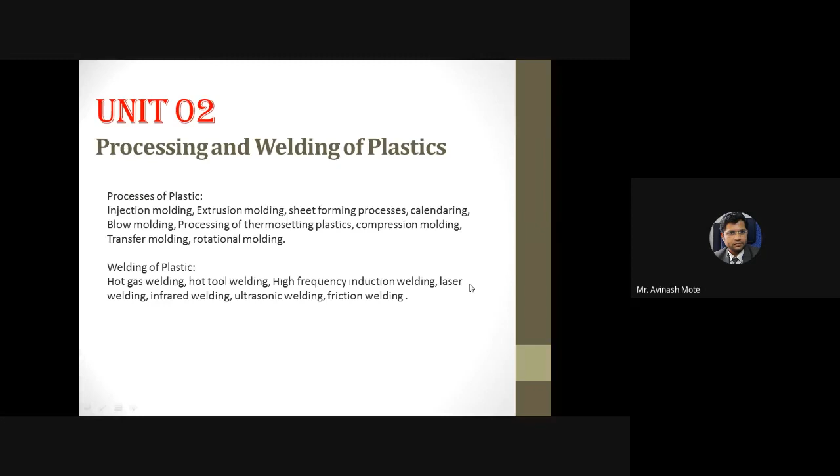So let's start with the first part of this unit, the processing of the plastic. There are so many methods for processing plastic. We are going to see the important methods widely used in industry nowadays. Processing of plastic simply means how any plastic product is manufactured. I need not explain much more about plastic products or applications, since we discussed so many applications in the last lecture.

The first... Okay, hold on, I think I lost my connectivity. Just 2 minutes, there is an issue with the connectivity. Just a minute, I'll come back once again.

So the processing of plastic is differentiated into two categories based on properties: the first is thermoplastic, and the second is thermoset. In the case of thermoplastic, as we discussed earlier, once you heat it, it will melt, and once you cool it, it will again solidify. It is totally reverse in the case of thermoset. So there are different methods for each.

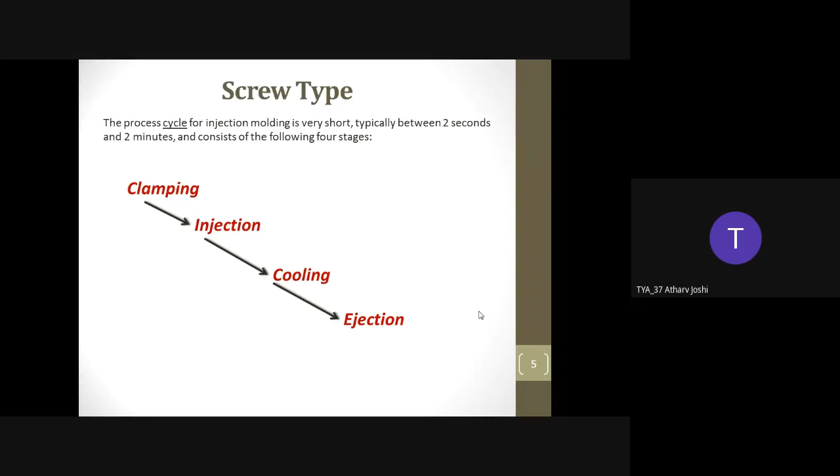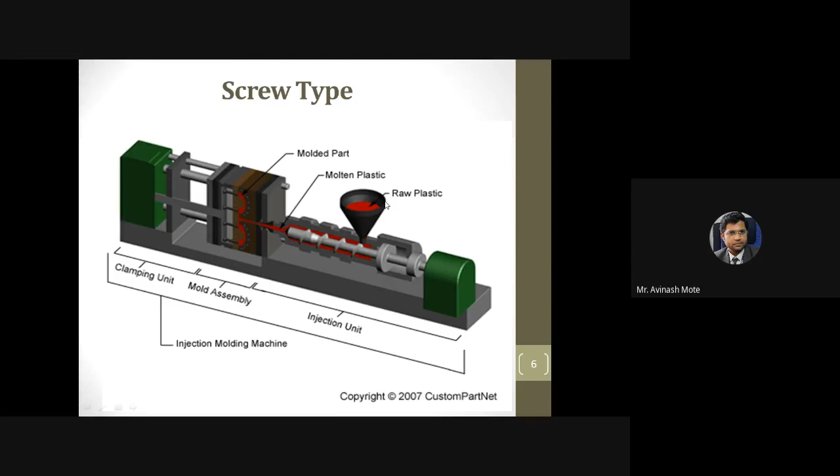The raw plastic may be in the form of powder, or in the form of pellets like tablets, or in the form of granules. This is given in the hopper, and there will be a heater around this screw which will melt down the raw plastic. Once this screw starts rotating, it will force this liquid inside the mold.

In casting, the mold has two or three plate molds, so it's not a single assembly, it can be separated. Clamping units and clamping bolts or simple clamps are used. One is a fixed part and another is a movable part, and in between there is a mold cavity. Once the liquid is forced inside this open chamber, the clamp is closed.

Outside this there will be a cooling unit, and that cooling unit will cool down that particular mold plastic which is in a molten condition.

So the first part is clamping. The mold will be placed inside this clamping unit, and the entire setup will be clamped. Then the second is injection. The screw will start rotating. There will be a hydraulic attachment, or a motor which will rotate the screw, and the rotation of the screw will cause the injection of the liquid plastic charge into this mold.

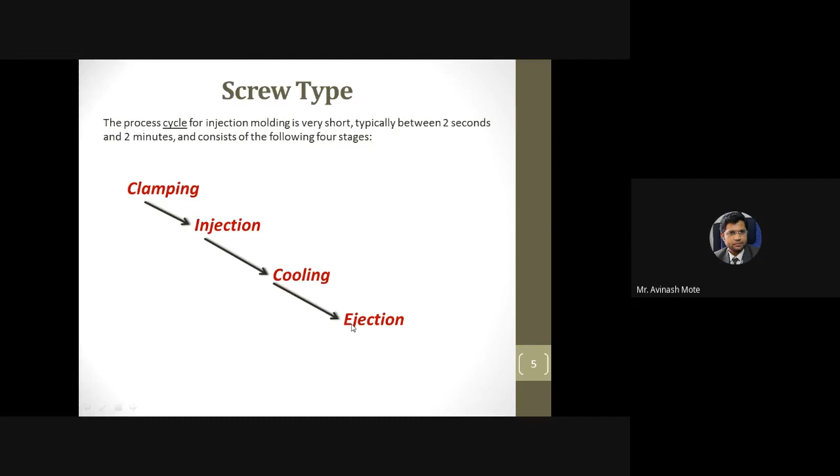This extra material you can trim down afterwards, and this final product you will get. Now, ram type - a simple structure. Here there was a screw for pushing the liquid plastic forward, and here it is only a ram, similar structure. Here is a hopper at the top, and the ram will push the liquid.

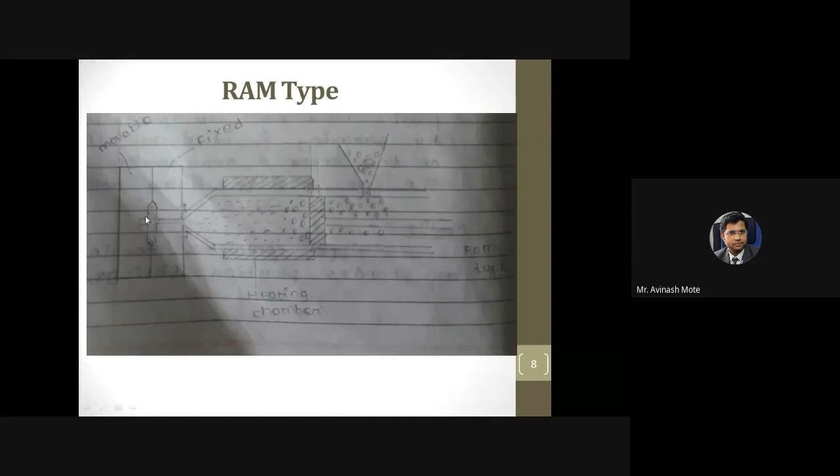It is simply like an injection. Mold will be as it is, heater will be as it is. Only in case of ram type, this ram will push the liquid. This ram will be attached to a hydraulic attachment, or sometimes pneumatic, or a motor - obviously reciprocating type - and this will push up the charge inside the mold, and it will take the shape as per the mold design.

So for better understanding, let's have some videos, you will understand it easily. Diagram will not explain everything. Let me show you.

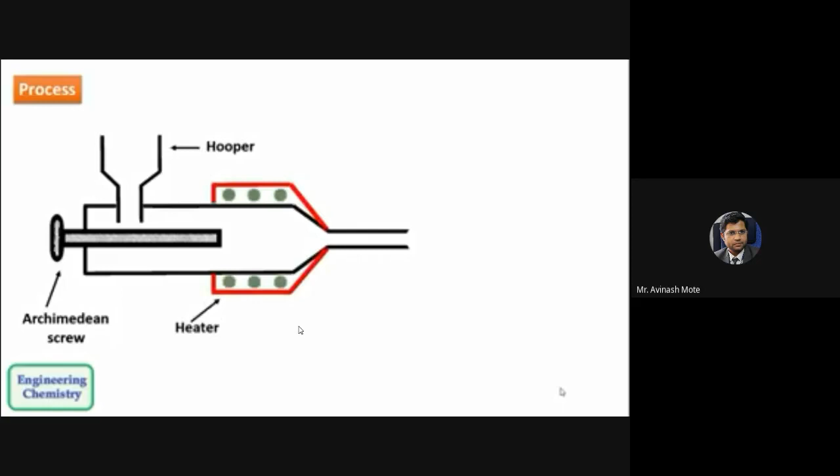So this is a hopper, this is a screw, or it can be a ram. Understand the setup, just a simple difference - either it may be a screw or it may be a ram. Obviously the pushing mechanism will be at the back side, and here will be a heater or heating coil, which will heat this particular liquid, and as per the shape, this will give the product.

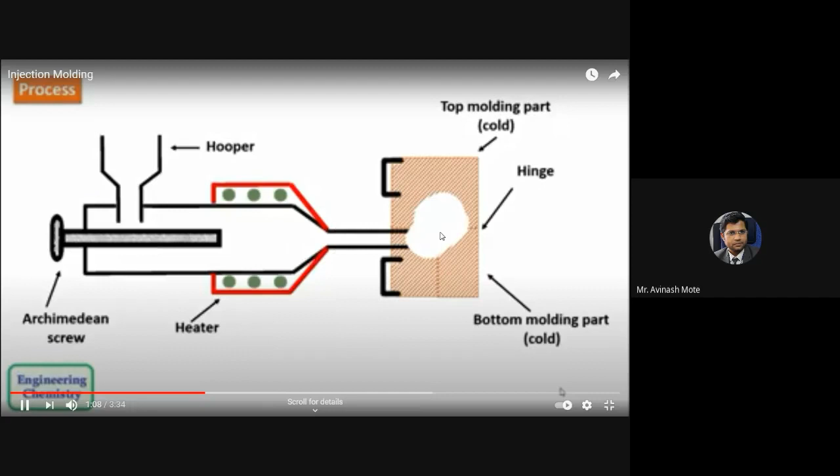Understand the meaning - here it was in a solid state, and here it is in a liquid state.

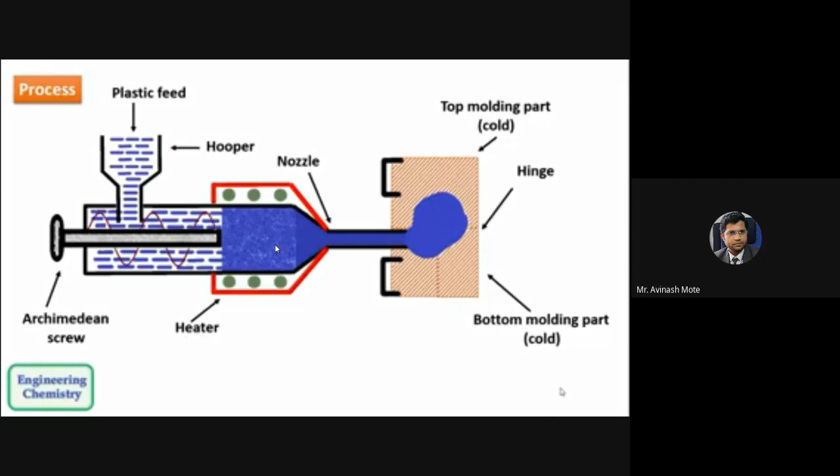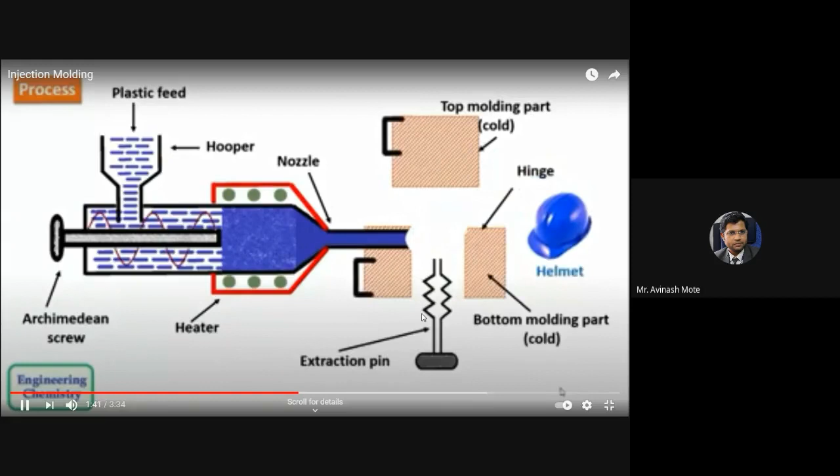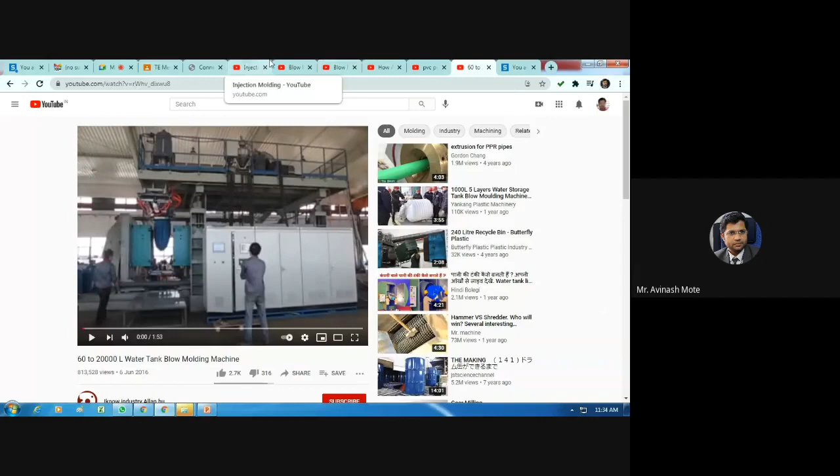Okay, so simple. I may have another one also. This is for blow, right?

A simple one. In case of ram type there will be a ram, and in case of screw type here will be a screw. Pushing the liquid inside this particular mold through this opening or orifice by using screw or ram. If it is a screw, it will be a screw type. If it is a ram, it will be a ram type.

Now you will understand the advantage and disadvantage also easily. There is no complication in this process. You change the mold design, you will get the part accordingly. But here, if you see this part, we cannot have a thick wall thickness. We cannot go for more wall thickness. There should be a thin part. Complexity we can manage, but it should be a thin part. If we go for a thicker part or large wall thickness part, this mold design will be quite large.

And again, what is the problem? See, if thickness will be more, when this liquid plastic enters the mold, till it fills the entire section, it will start cooling down and settle immediately. So that is the problem. So flowability should be good if your wall thickness is going to be more.

Simple parts with less wall thickness we can manufacture very easily. Now there are so many applications like cups, small thickness containers, housings. Mostly housings are made from this particular machine or process, because housing or casing doesn't require more wall thickness. If you see the mixer casing, or any type of casing required, that is made through this process, because housing doesn't require more wall thickness, simple and no complex features. Housings, handles, plumbings and fittings - these types of parts can be easily manufactured through this.

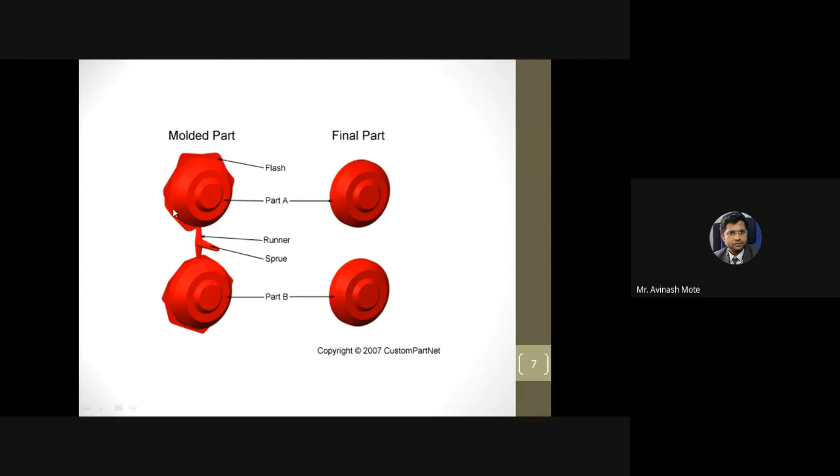Minimum wastage - you may have seen here, less wastage. If you see this extra material, it's just because of this mold design also. So if your mold design is proper, this also can be reduced. So wastage will be very less, and complex geometry can be produced, but there are some limitations.

Now, higher tooling cost and setup cost - major issue. Now see the structure, screw, mold design, and this entire setup. The machine will be required to push up the screw, machine will be required to push up the ram. This entire setup will have a huge tooling cost. But this is a one time setup, obviously, but the initial cost is very high. Obviously this heating element will also be there. So the major disadvantage is that the cost of the machine is going to be more. It may be a screw type or a ram type, but the cost will be more.

But whenever you are having bulk production, you can go for this, and less variation of the parts.

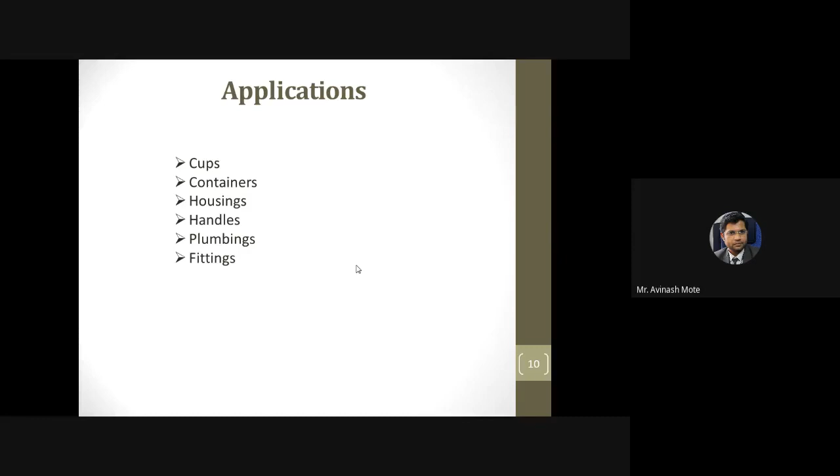Second one, again the most widely used, more than injection, this is called extrusion molding, the most widely used process. Similar to injection, only the pushing of the plastic will be different, in a different way.

Example I have given, simple to understand - squeezing of toothpaste from the tooth tube. You know how we are doing it, squeezing of toothpaste from the tube. It is as simple as that. That process is actually called a squeezing process or extrusion process. What is happening there? You are just pushing or pressing that toothpaste tube, and the toothpaste is coming out in the form of a barrel. Because it is in a semi-liquid or semi-solid state, the liquidification level is quite more, so it is not coming directly in the form of a barrel. But if you push it forcibly, it will come out in the form of a barrel. Why is it coming in the form of a barrel? Because whatever that orifice is there, the toothpaste opening is in the form of a simple circle-like opening, so it comes out in the form of a barrel.

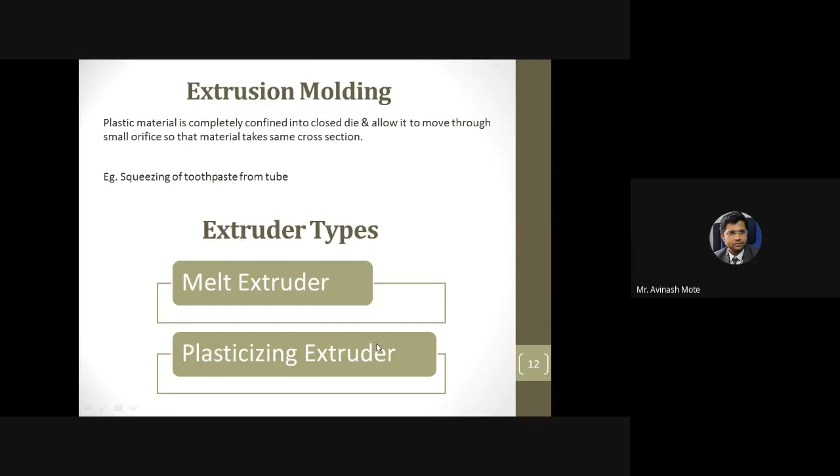So this is a simple example of extrusion molding. Now there are two different types depending on the extruder - the first one is a melt extruder and second is a plasticizing extruder. Melt, in the sense, only pushes the molten plastic, and in case of plasticizing it is pushing the solidified plastic also. Only basic difference - a molten plastic will be extruded here and solidified plastic will be extruded in case of plasticizing extruder. Only molten, and only plasticized or solid plastic particles.

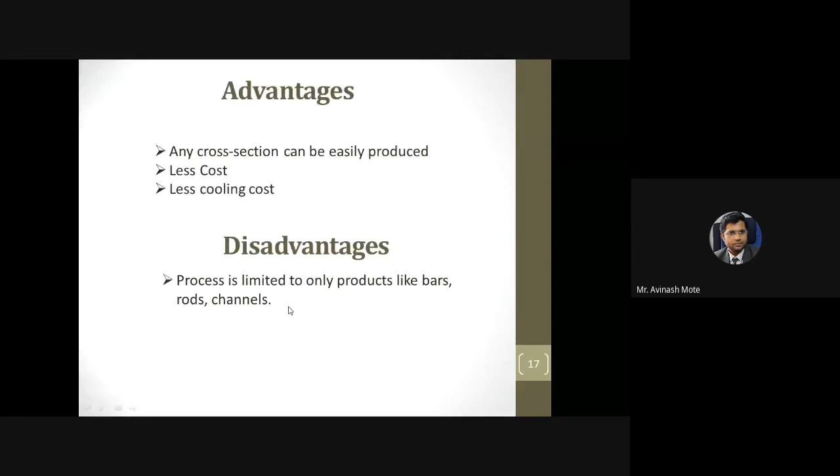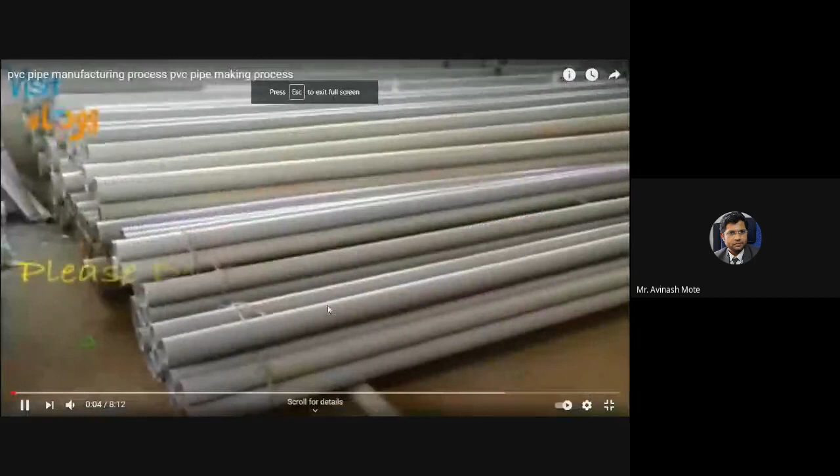Now see, we'll have a good... just see it now. Quite a local video, but an interesting one - it will explain everything.

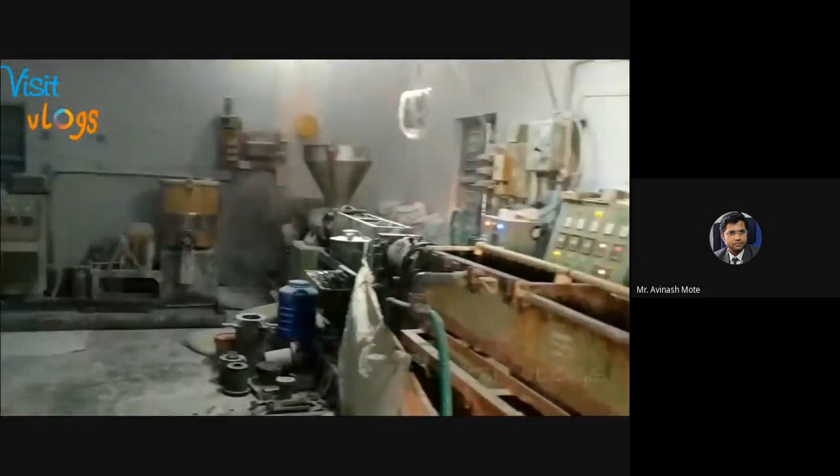This is a local setup, a local unit. But see, here is the extruder - sorry, hopper, and this is the extruder. And if you see, here is a cooling tank - are you observing this pipe which is dropping water continuously? Here is the setup, this screw type setup, the hopper. Now you will understand each and every process here properly. Check it out.

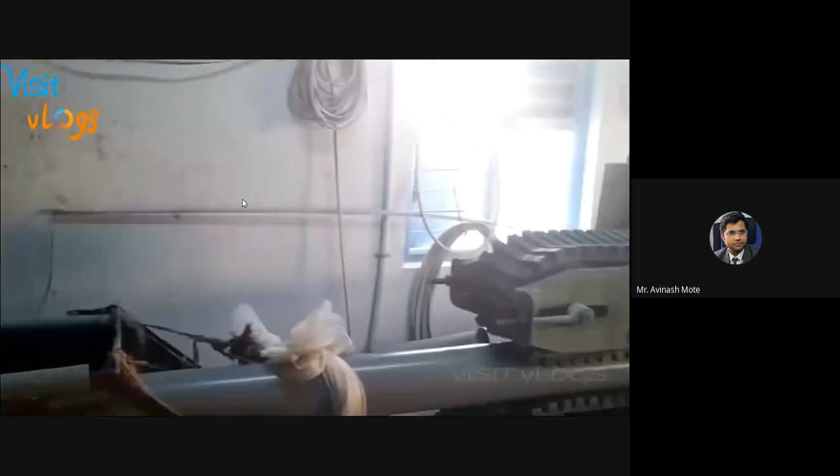This is like a roller which is giving the proper shape. See here, what is this - this is raw plastic. Now what is actually happening, if you observe at the back side, these are recyclable plastic pipes, and this is waste. This waste is first crushed in the machine, and small plastic particles are prepared. These plastic particles are again reused for the manufacturing of plastic, so it is a reusable type.

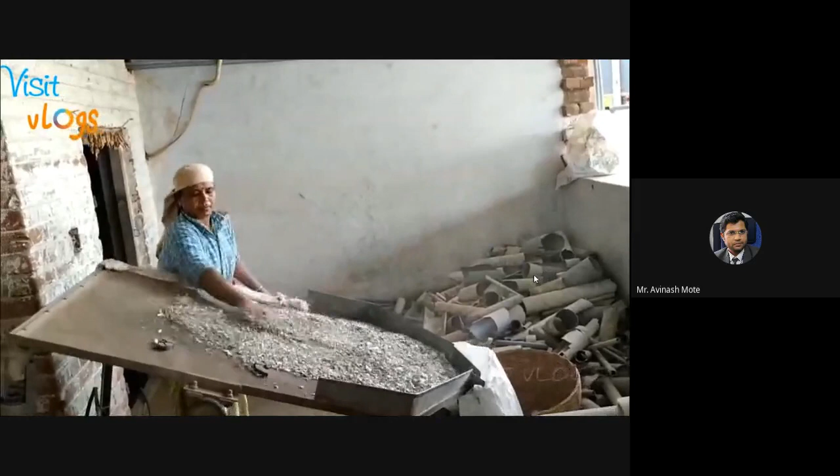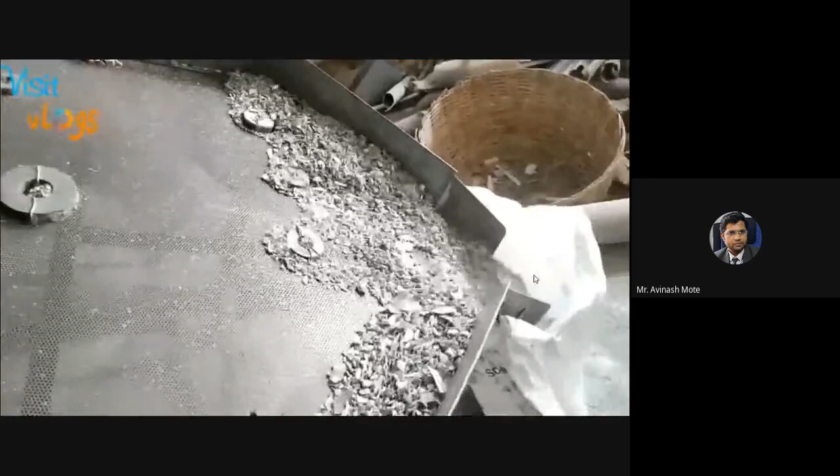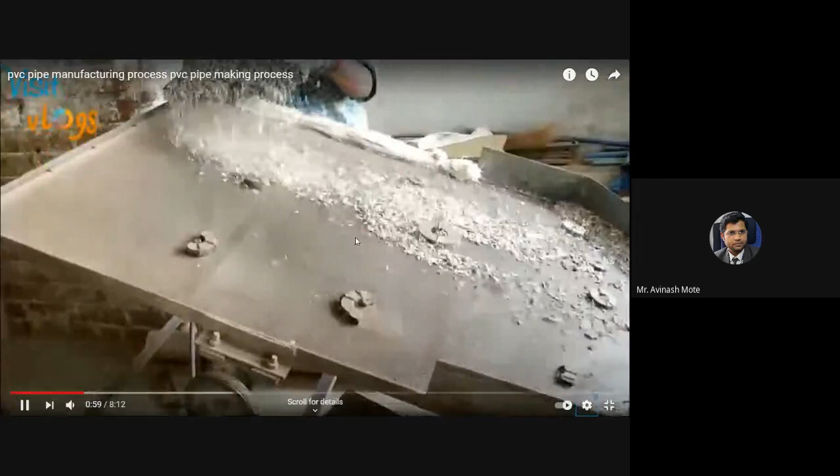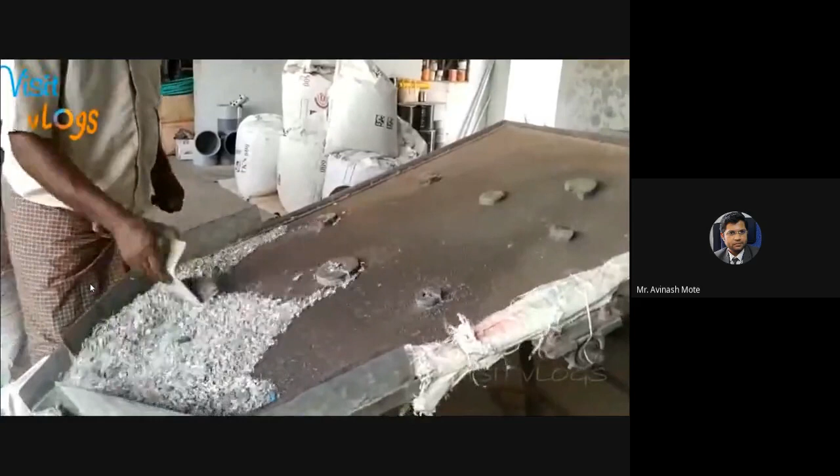So you can call these plastic particles. If there are any other different particles, it is removed - a porous screen is there. Sand particles, if there are any, will be removed through the screening - it's simply a filtering. You can call this granules also - actually the granule shape is different, but you may call this also.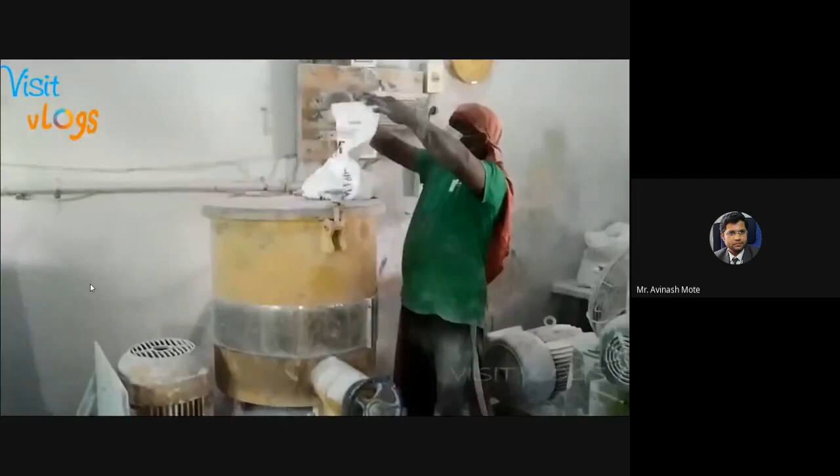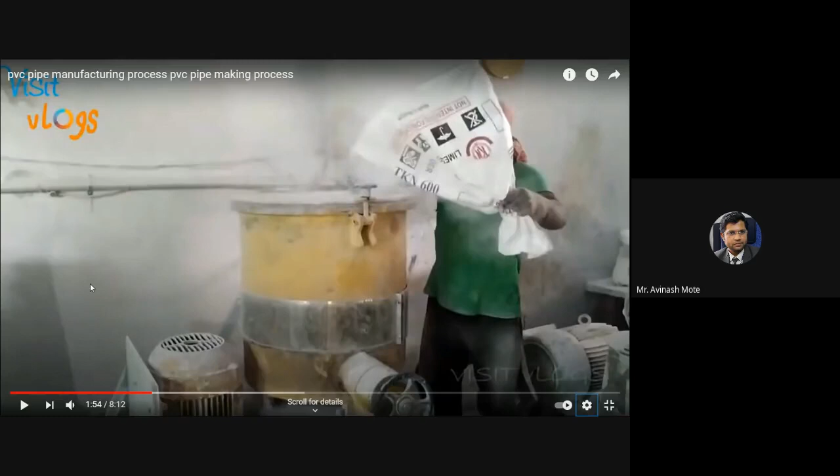Whenever you have proper granules, only then will you get uniformity. This is the process of making granules. First, raw plastic is crushed down, then it is filtered - that process we have seen. Now you will see how pellets are made.

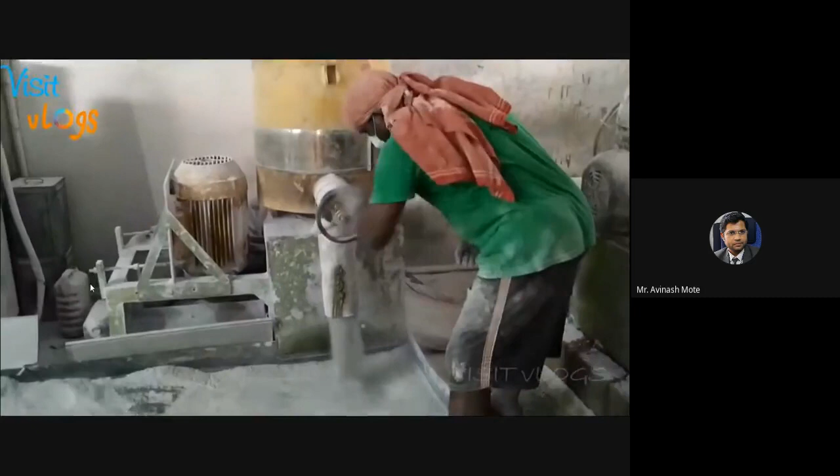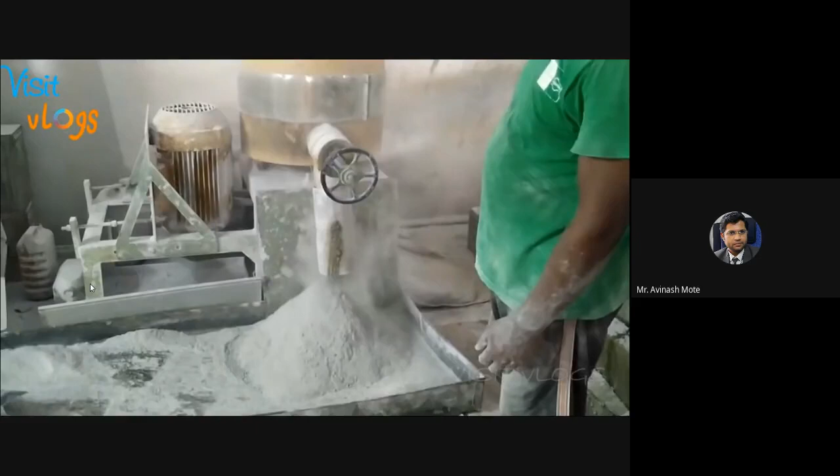This is a powdering process. This will crush down - it's simply a crushing process. It will crush the material and make it into powder form, because the broken parts were in different sizes and shapes, so it is required to make it into a powder form.

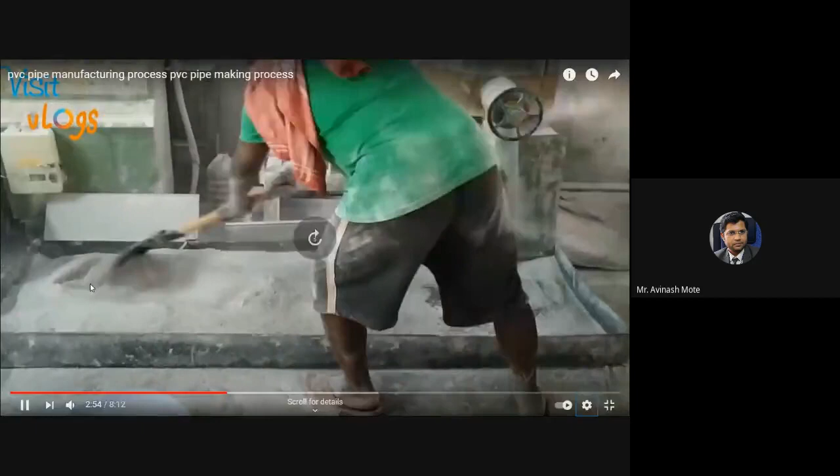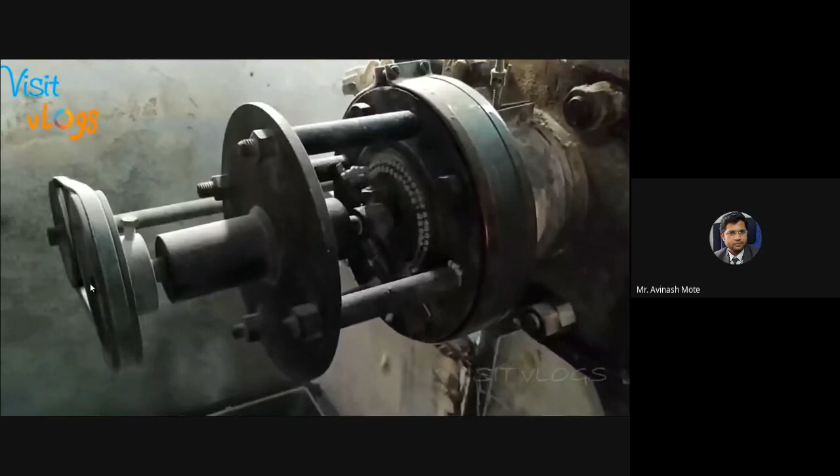Check here properly. This is called a granule making machine. Are you getting how it is operating? See, this plastic powder is coming out of this extruder. This is also an extruder, this is also an extruder. There are so many openings.

So many openings - you can call this co-extrusion. Just now we have seen co-extrusion. So many openings, and here is a cutter which is cutting this particular plastic into small granules of equal size. Check it out.

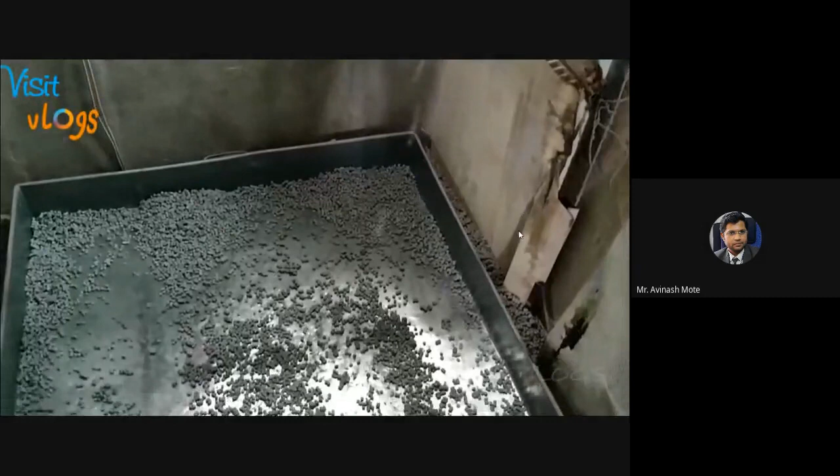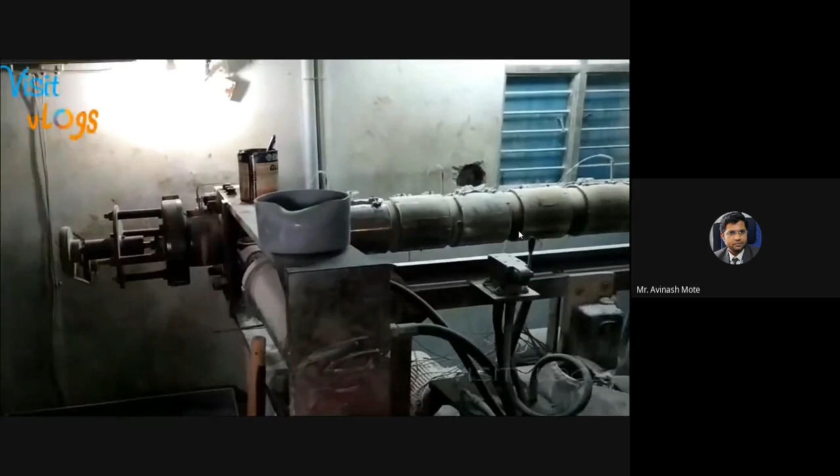Are you observing? At the bottom, equal size granules are there. You can even set up just this much, and you can sell these granules. There are so many companies that are only collecting plastic from garbage, and then processing it this way, and you can sell the plastic granules.

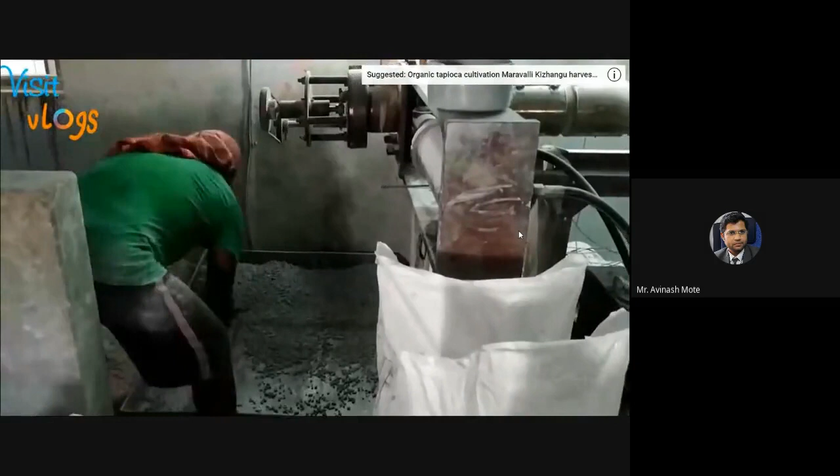Look at the cursor here. This is a heater coil, heating coil, which is heating that powder, the plastic powder.

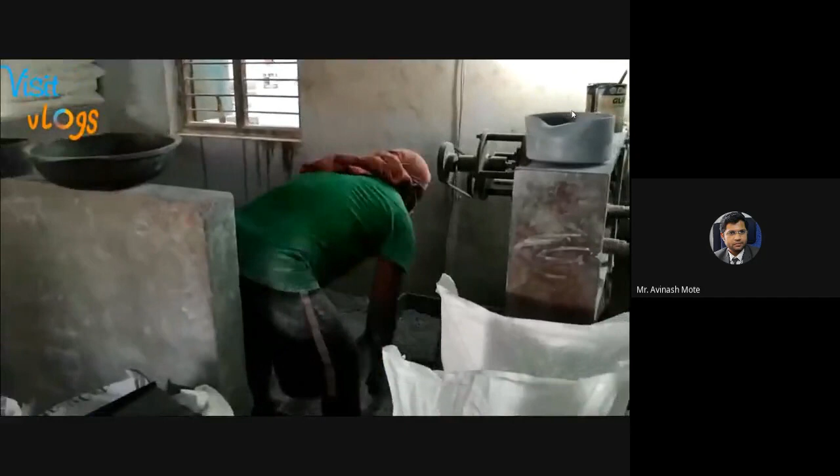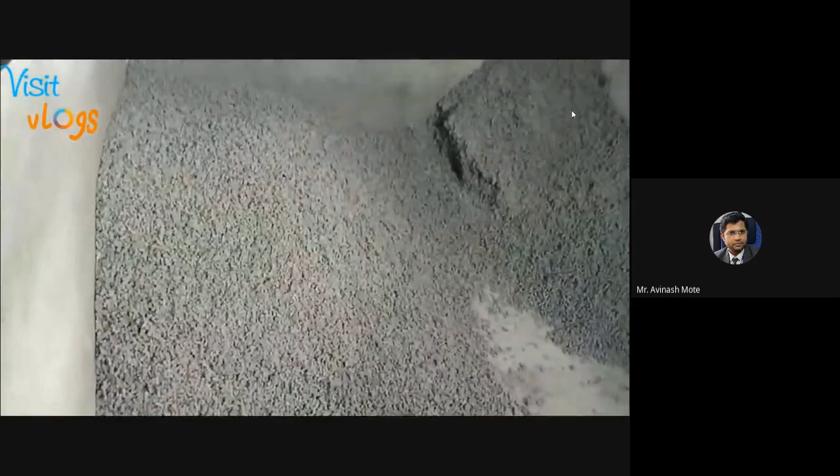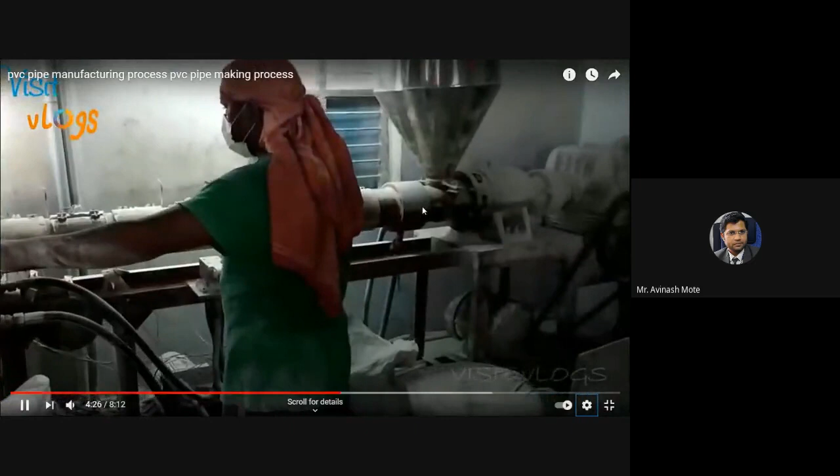See, equal sized granules, equal sized granules. Getting it? Here is the hopper, here is the hopper, and here is the extruder. But this extruder is used to make the raw plastic granules.

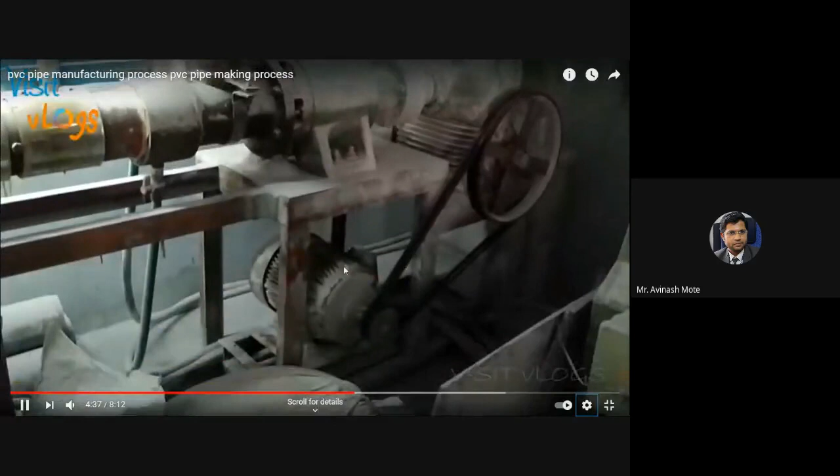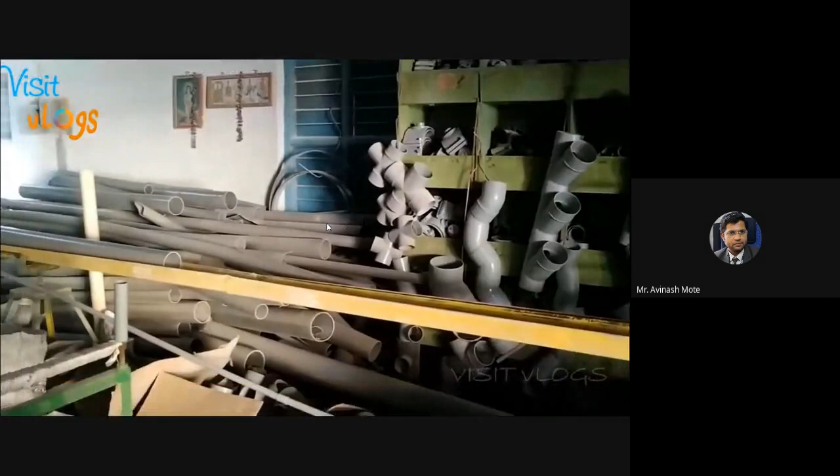Here is the machine, so here is the motor which is moving the screw. In this hopper, look there, this powder is given here, and these are the final products. Now let's see how these pipes are made.

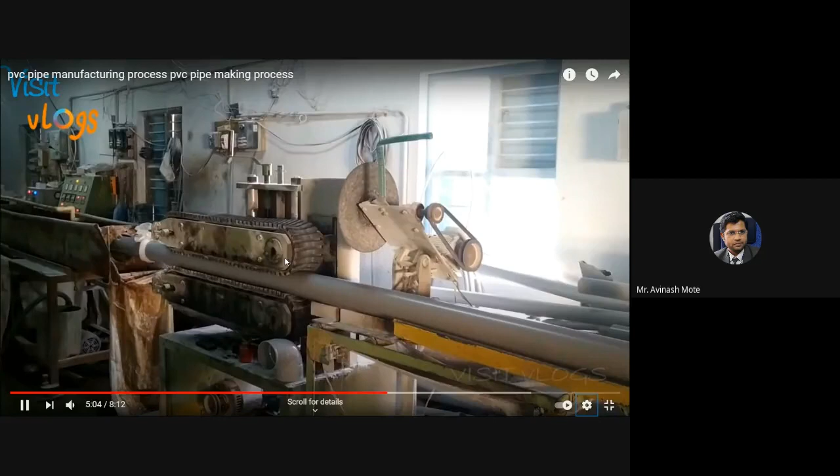Now here is the actual extrusion process. These rollers will not allow it to bend, okay, so that is required. Cooling unit.

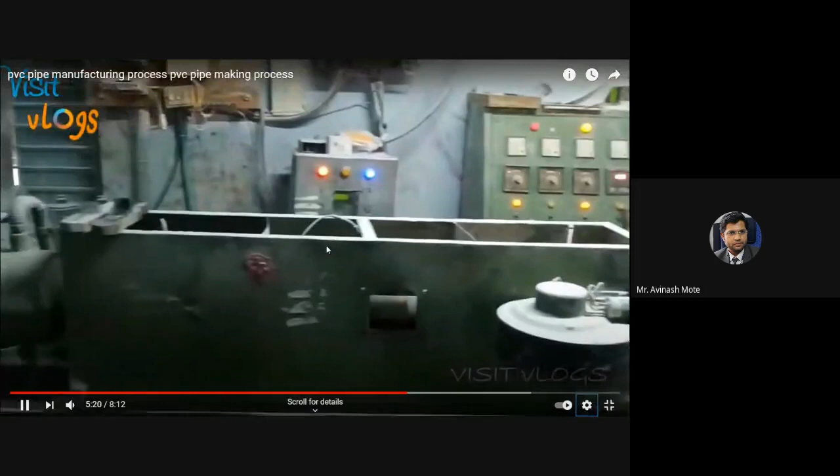Hopper, at the backside the motor which will rotate this spindle and the screw inside this particular extruder. Now check out, here are the granules, not the powder - see the shape, equal sized granules. Are you getting equal sized granules? So the powder is first converted into granules, and then granules into the product.

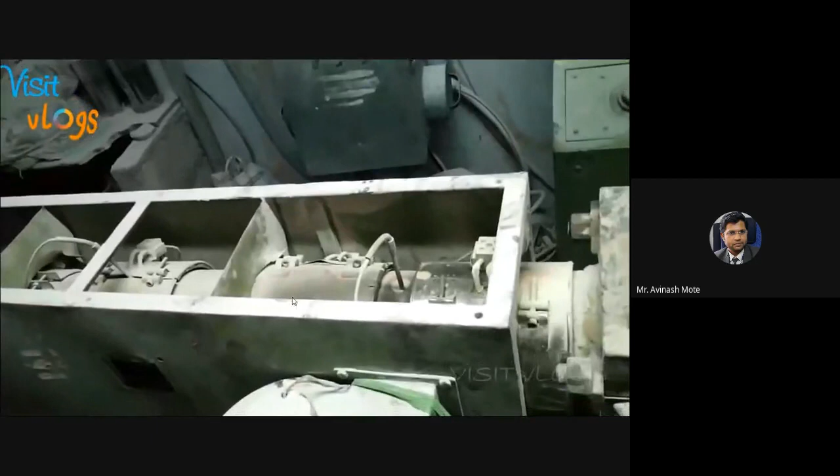There is no such complication in this process. Just heat it, liquefy it, put it into the mold, and you will get the product. These are the thermocouples, which will heat the plastic inside this extruder. Getting it? Cooling unit - this pipe is coming out of this particular extruder.

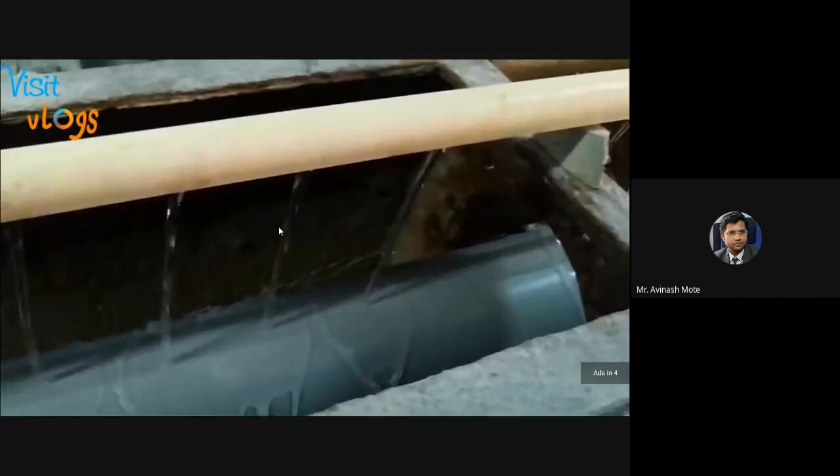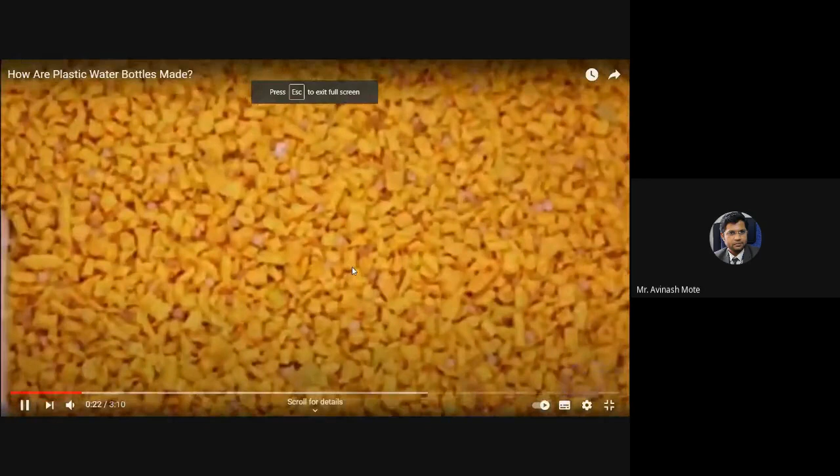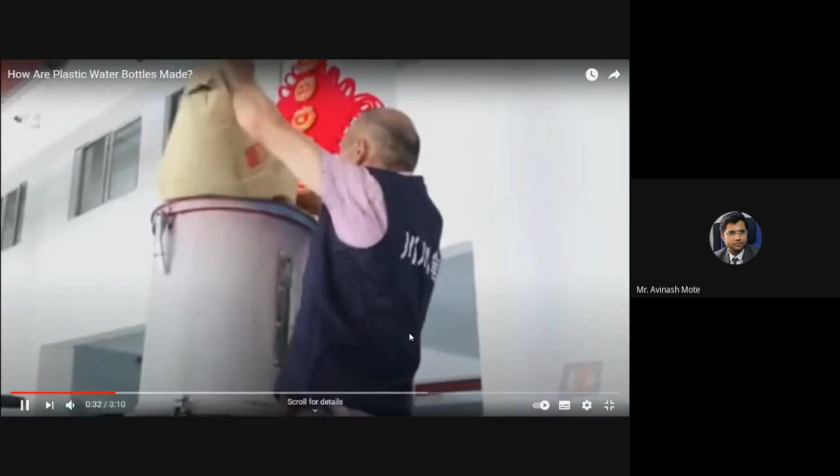I think this is a blow - let's see. There are granules. Okay, these are the pellets which are... okay, this is the machine.

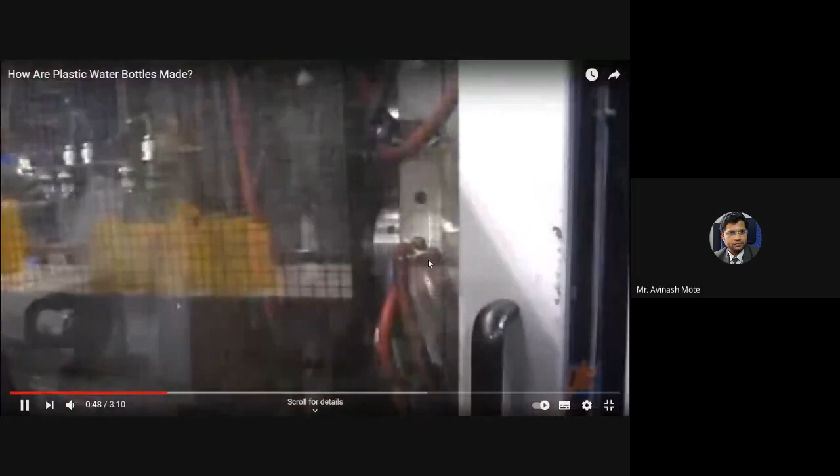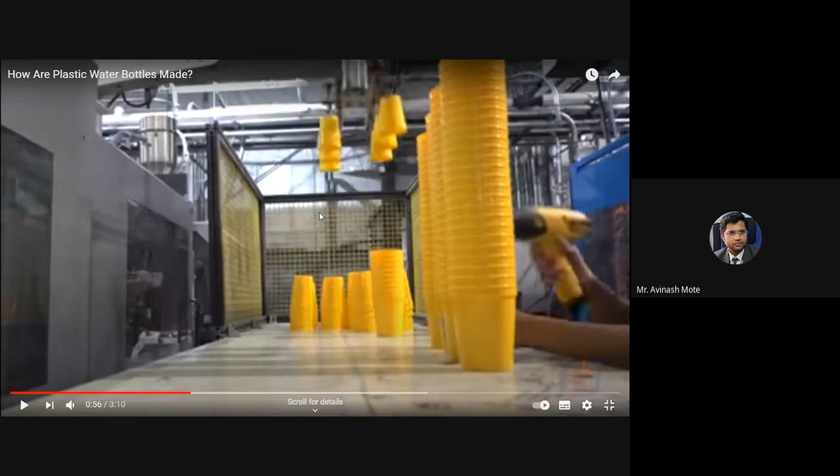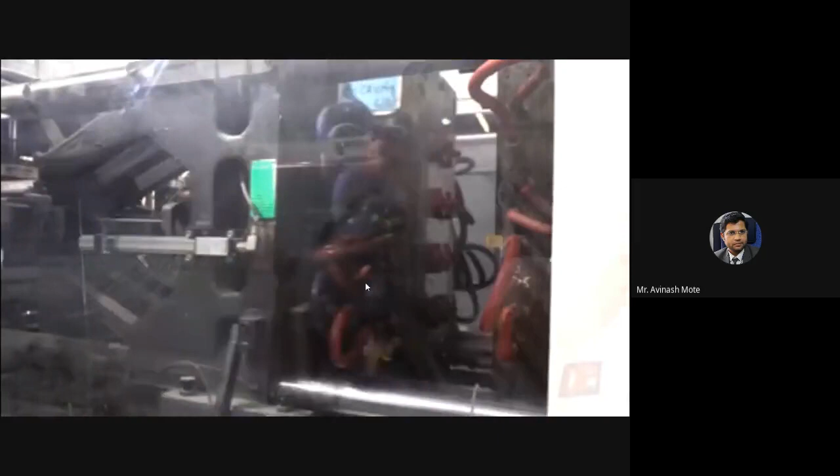This is simply an injection process - this is the injection molding. What I told you in injection molding is that wall thickness is going to be quite less, so these are the products - cups, caps, small wall thickness.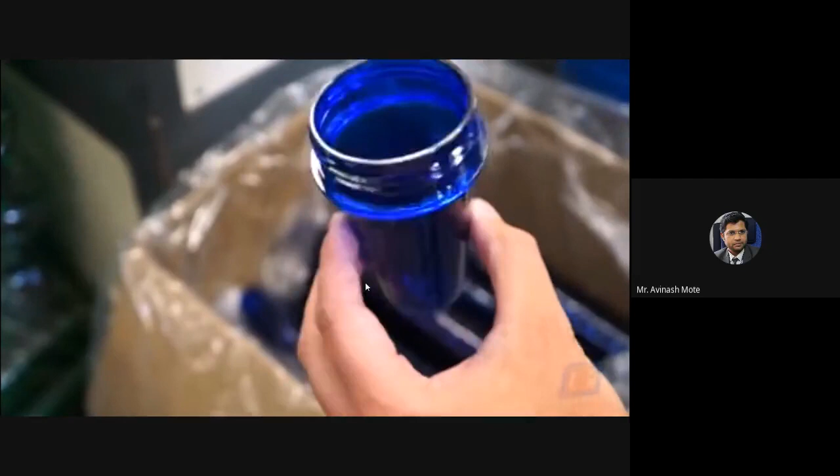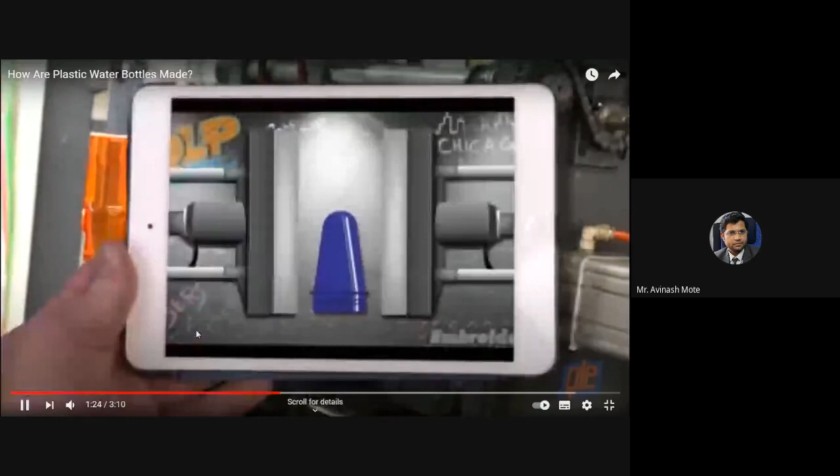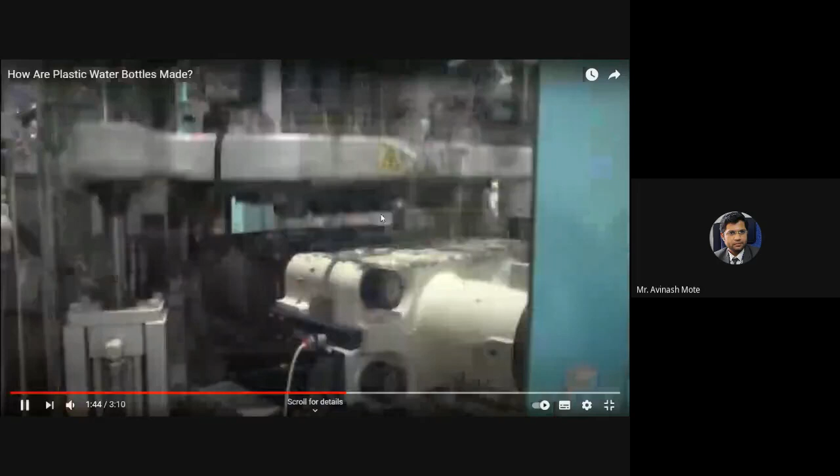This is a different process - this is blow molding, don't go for this. Extrusion molding - here pipes are manufactured through the extrusion molding process.

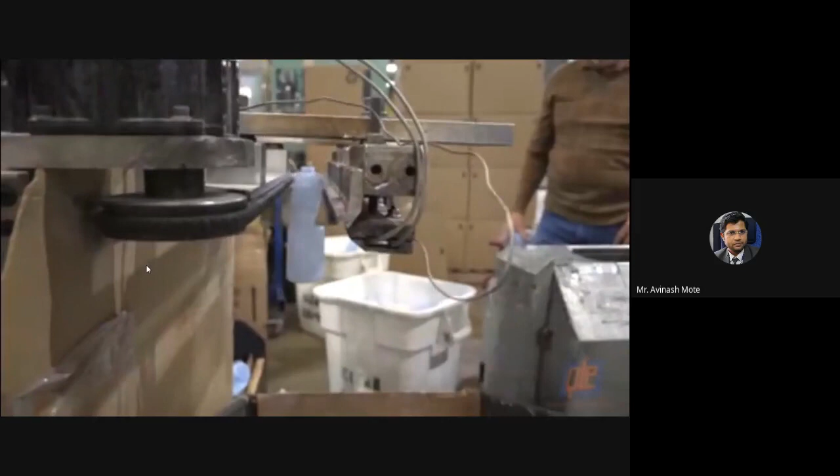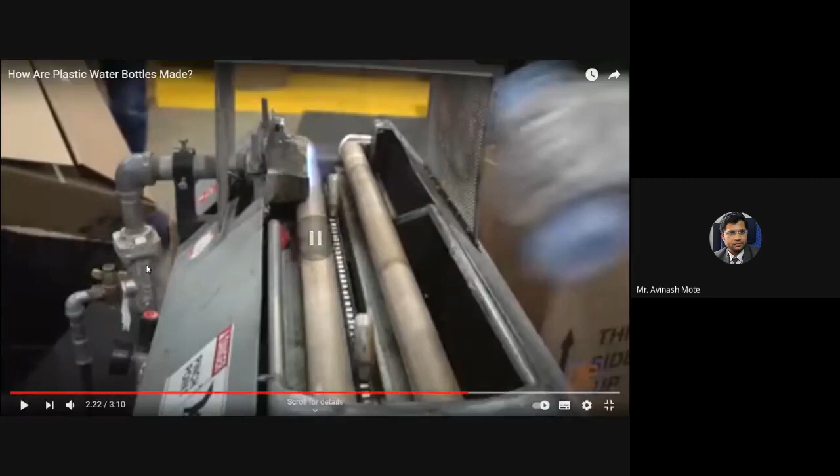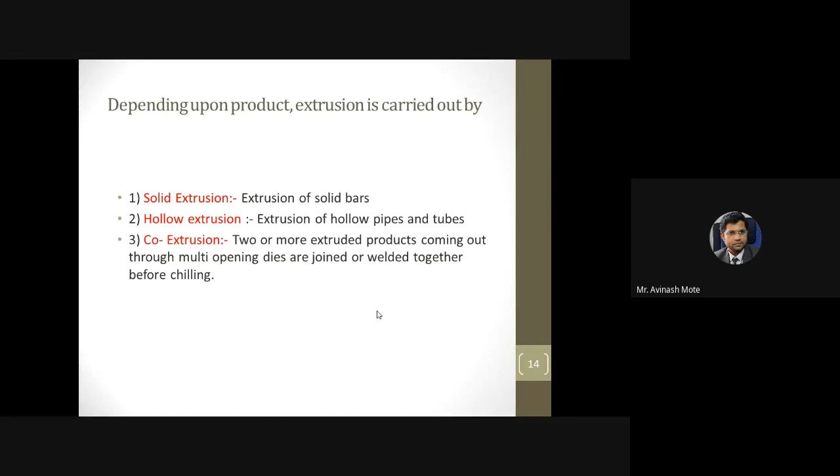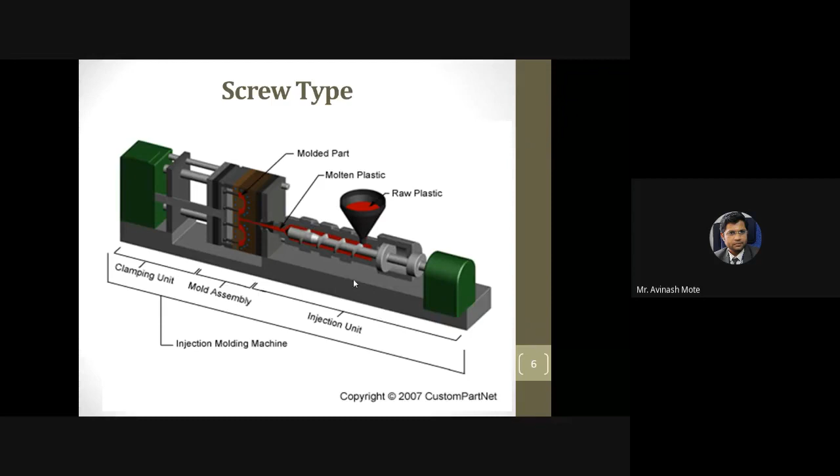Let's come back. So, this was the extrusion process, and this was the injection. Now through the video you may have understood easily - a simple process, a simple setup, a screw or ram pushing it inside the mold. In case of extrusion also, similarly, a screw or ram pushes it inside the mold. Just as per the setup, the products are going to be different.

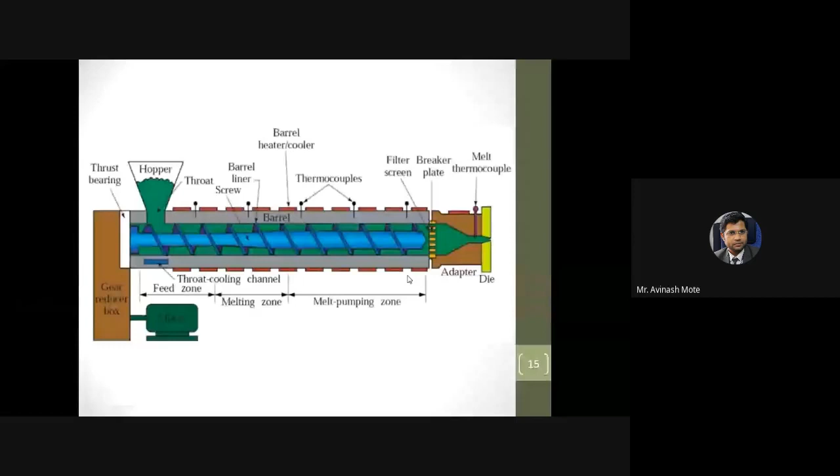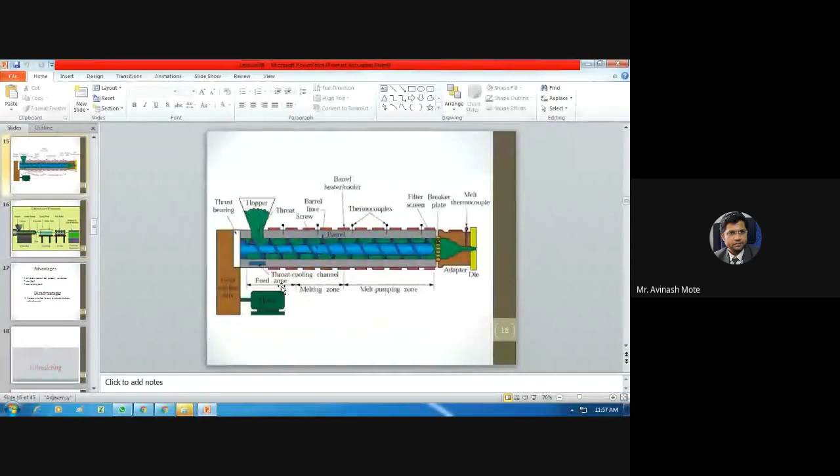How much time? 11:57. So one more process we'll cover in the next lecture. We'll have one more lecture in the afternoon, so we'll stop here, and in the next lecture we'll go for calendering and blow molding - that is also a very interesting part. We'll stop here for this session.